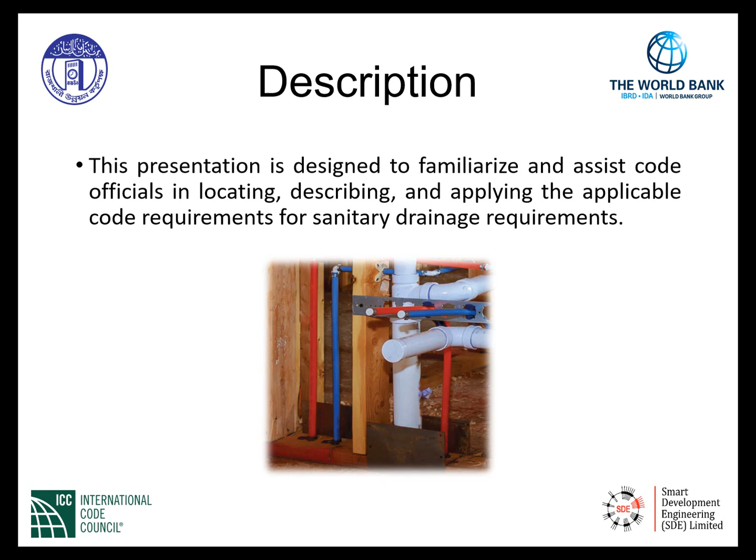An overview of the course. Internationally, code officials recognize the need for a modern, up-to-date plumbing code that addresses the design and installation of plumbing systems through requirements emphasizing performance.

This presentation will cover key topics of the following areas: purpose and scope, terminology, permits, drainage and sanitation plans, licensing of plumber, drainage and sanitation requirement, materials and appliances, hangers and support, and finally, design considerations.

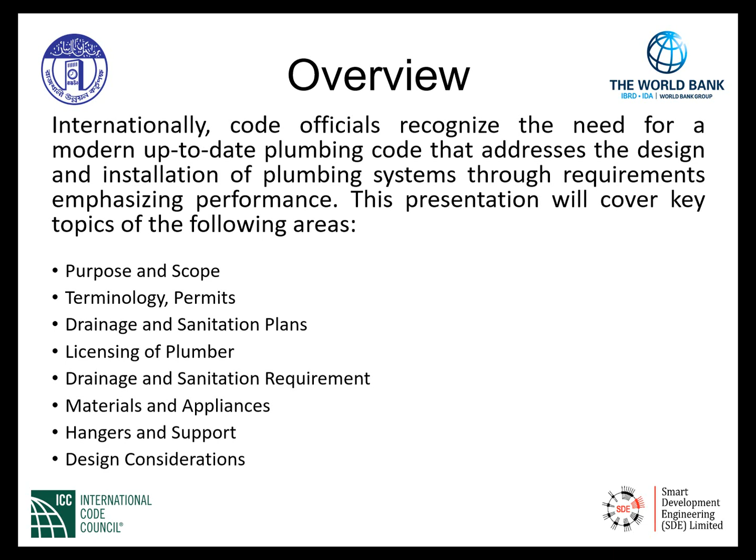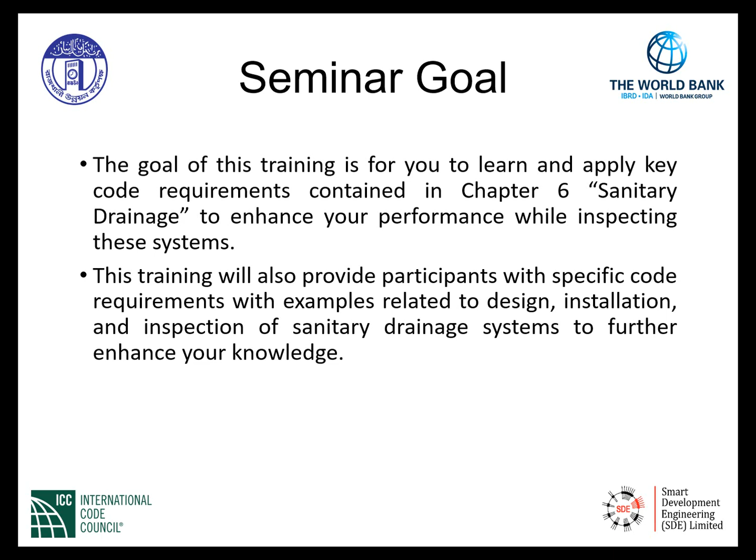Our seminar goal is for you to learn and apply key code requirements contained in Chapter 6, Sanitary Drainage, to enhance your performance while inspecting these systems. This training will also provide participants with specific code requirements, with examples related to design, installation, and inspections of sanitary drainage systems to further enhance your knowledge.

Our course objectives are as follows. Upon completion, participants will be better able to locate general topics in Chapter 6 Sanitary Drainage, locate applicable codes and standards for specific situations, apply code requirements to real-world situations, as well as explain the intent behind a given code requirement, and finally use good judgment to identify certain systems and related components as compliant or non-compliant.

We utilize the code as a guide for not only the design basis of a system regarding sanitary drainage and venting, but also the installation requirements for a safe system for the end user.

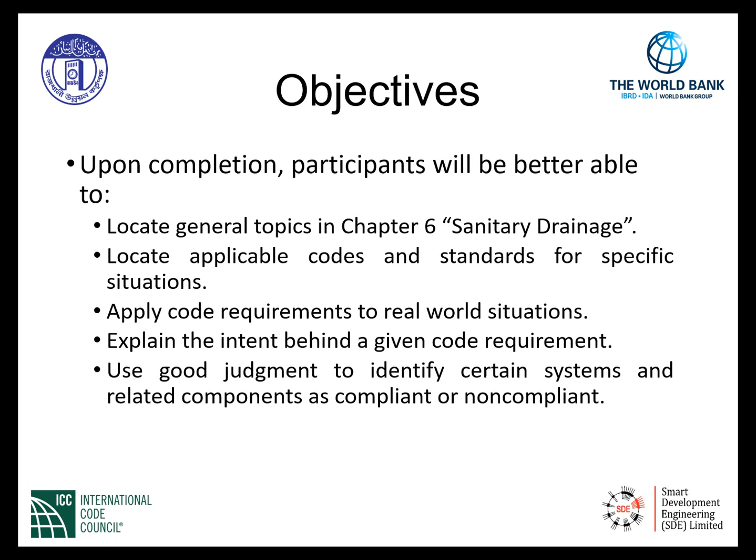Sanitary drainage. Some general information is indicated here. The purpose of Chapter 6 is to regulate the materials, design, and installation of sanitary drainage piping systems, as well as the connections made to the system.

This could be the drainage piping that carries the wet portion of the discharge, as well as the venting portion, which provides an atmospheric pressure into the system as well.

The intent is to design and install sanitary drainage systems that will function reliably, are neither undersized nor oversized, and are constructed from materials, fittings, and connections whose quality is regulated by this section.

Plumbing fixtures installed in a building or structure must connect to a sanitary drainage piping system, and that system must connect to a public sewer system or private disposal system.

The conventional method of sizing a sanitary drainage system is by drainage fixture units, abbreviated DFU. These are load values. The drainage fixture unit approach takes into consideration the probability of a load on a drainage system. The drainage fixture units allow us to properly estimate the capacity of pipes that are constructed for our drainage system.

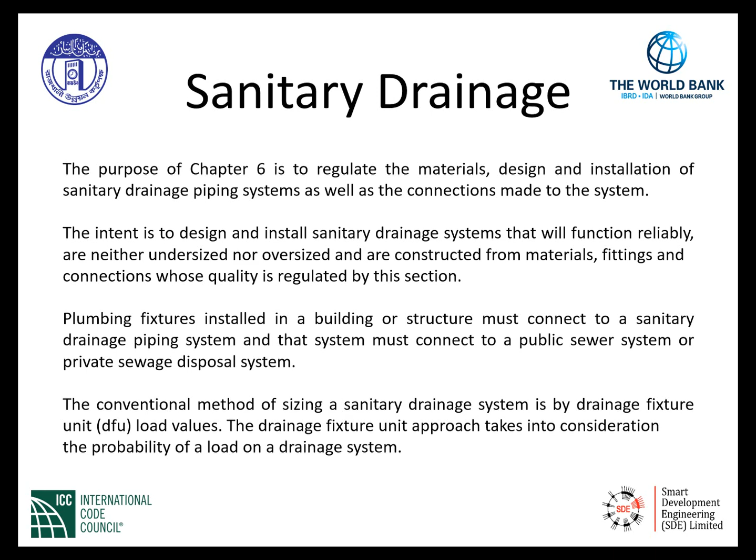Section 6.1 is titled Purpose and Scope. The purpose of this chapter of the code is to provide requirements and minimum standards for the planning, design, and installation of waste disposal systems in and out of buildings.

The authority has the responsibility for administering the code to ensure that waste disposal systems in homes and the buildings in which people live and work are designed, installed, inspected, and tested to provide acceptable waste disposal functions.

Additionally, the proper design and installation of waste disposal systems, according to Chapter 6, provides a level of protection regarding health, safety, property, and public welfare. This initial section of the code gives the authority that ultimate responsibility for administering this code to ensure public safety.

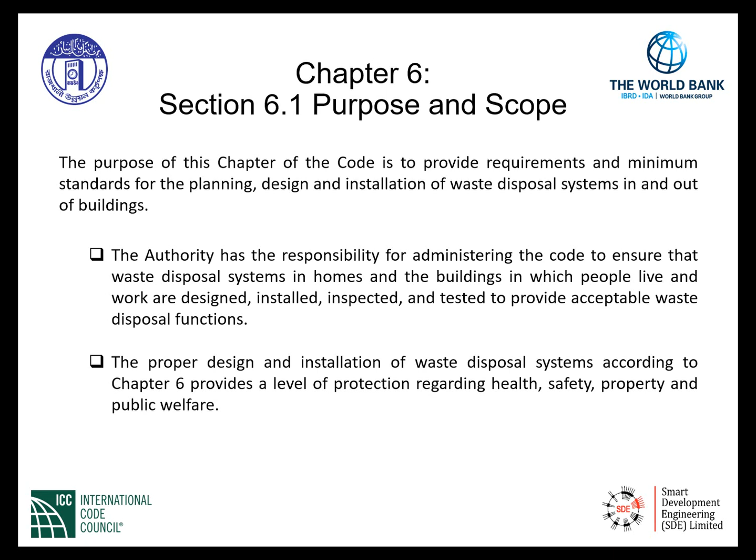Section 6.2 is titled Scope. This section gives us the requirements whether the application fits this code or not. When we look into section 6.2.1, it indicates the following: this chapter specifies the general requirements for environmental sanitation for different categories of buildings according to their occupancy classification.

We further look onto the next section, which is section 6.2.2. This chapter also covers the design, installation, and maintenance of drainage systems together with all ancillary works such as manholes and inspection chambers used within the building and from the building to public sewers or to off-site waste disposal systems—in other words, into septic systems and seepage pits or subsurface drainage systems.

Finally, Section 6.2.3 tells us that the disposal of waste from industries, nuclear plants, slaughterhouses, etc., are not covered by this code. These wastes shall be properly treated as specified by environmental quality standards of Bangladesh before their disposal into public sewers or into natural bodies of water.

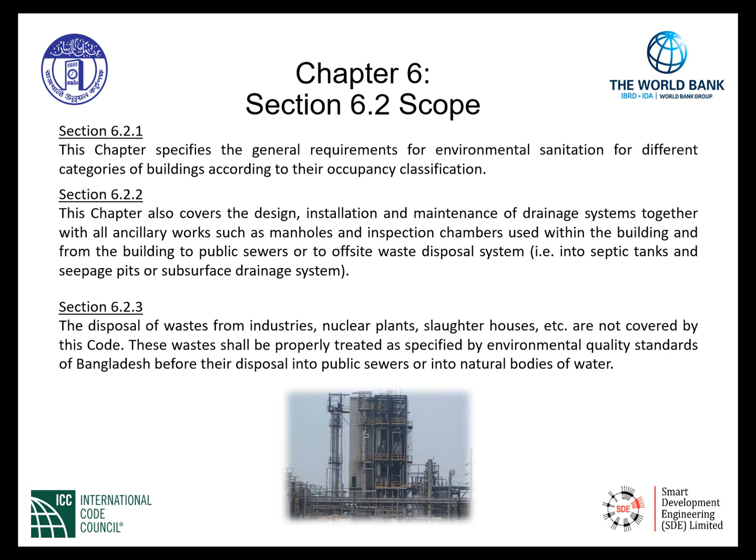So this section gives us the driving language to understand when we are in the code or out of the code with respect to our applications.

Section 6.3 is titled Terminology. This section provides an alphabetical list of all terms used and applicable to this chapter of the code. In case of any conflict or contradiction between a definition given in this section and that in any other chapter or part of the code, the meaning specified in this chapter shall govern for interpretation of the provisions of this chapter.

This spells out clearly that the terminology contained within this section is very specific to our study today on sanitary drainage systems. The terminology has a specific meaning and shall govern the interpretation accordingly. A code provision could be misinterpreted if the definition of a term, as used in the context of this code, is not understood. The following slides will provide key definitions to assist the code user in properly understanding certain terminology related to this chapter.

Codes, by their very nature, are technical documents. As such, literally every word, term, and punctuation mark can add to or change the meaning of the intended result. This chapter contains several terms that are important to understand the provisions of this code. Definitions are found both in this chapter and throughout the code. So let's look at some key terminology.

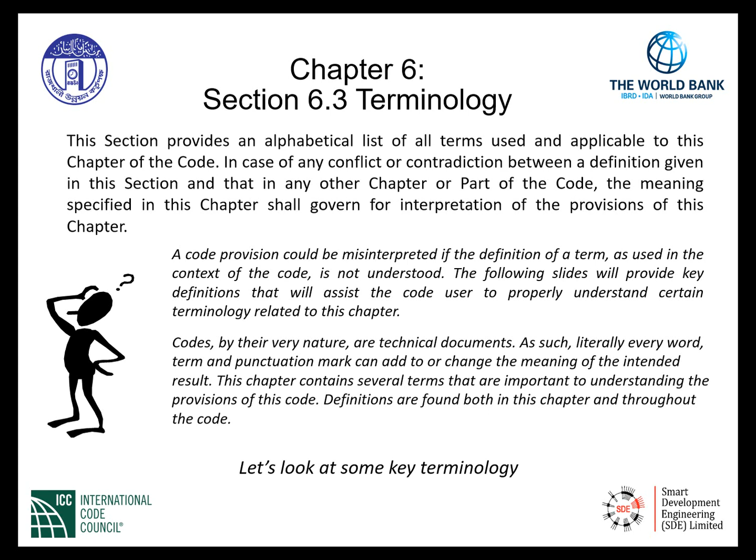Branch is defined as any part of the piping system other than a main, riser, or stack.

Drainage system gives us a specific definition. A drainage system includes all of the piping within public or private premises, which conveys sewage, rainwater, or other liquid waste to a legal point of disposal, but does not include the mains of a public sewer system or a private or public sewage treatment or disposal plant.

We have a drawing indicating a drainage system and components. The example shows a drainage system conveying waste from fixtures to the sanitary building drain, then to the sanitary building sewer. Looking at the drawing, we observe the sanitary building drain within the building below the second floor level. This is the location that conveys the discharge from all of the fixtures connected above. The piping is sloped downward and conveyed to the outside of the building into the sanitary building sewer.

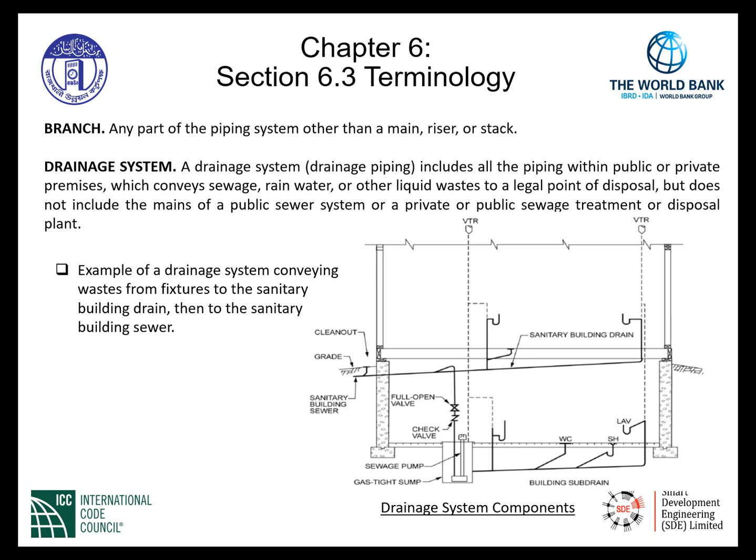Branch interval: the length of soil or waste stack corresponding in general to a story height, but in no case less than 2.5 meters, within which the horizontal branches from one floor or story of a building are connected to the stack. One branch interval corresponds to a length of drainage stack that has two horizontal branch connections at least 2.5 meters apart.

As seen in the graphic to the right, we have two different floor levels. Based upon these two different floor levels, we are concerned whether the piping arrangement indicated on both sides of the soil or waste stack is considered a branch interval. To the right-hand side of the soil or waste stack, we can see that the measurement from the horizontal drainage pipe below floor level 1, the soil or waste stack rises, in this case, 2.5 meters or more to the next horizontal drainage pipe tied to the soil or waste stack. When this happens, this is considered a branch interval.

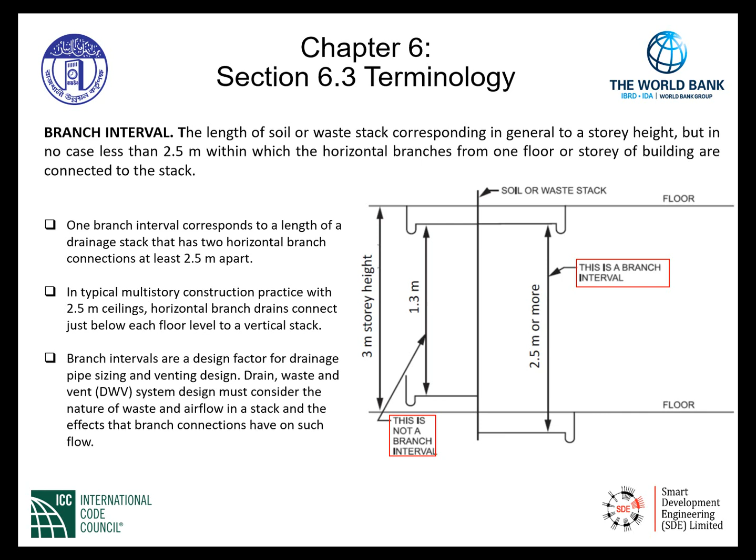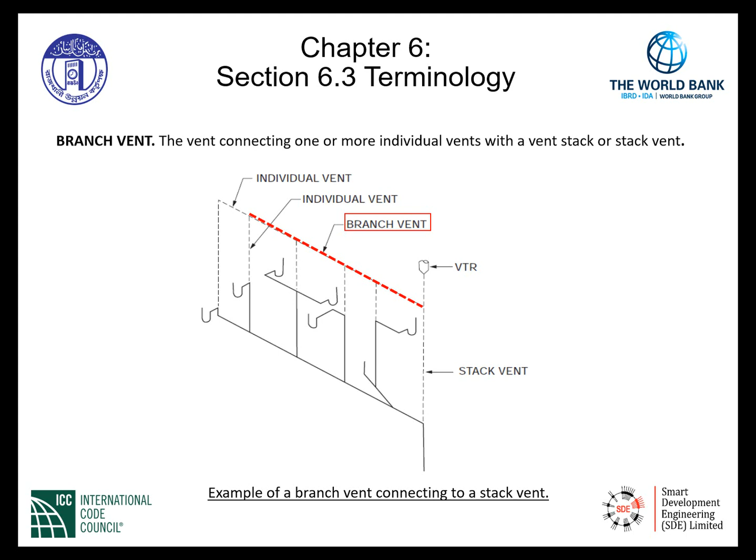The term building drain gives us an identification of what this particular segment of the building drainage system is. It is defined as that part of the lowest piping or open channel of a drainage system, which receives the discharges from soil, waste, and other drainage systems inside the walls of the building and conveys the same to the building sewer, beginning at 0.9 meters outside of the building wall. As you can see, the graphic at the bottom of the slide indicates the building drain as being the lowest piping indicated within the building. It then extends 0.9 meters from the outside of the building wall. That is where the building drain ends.

From that point, the next part of the piping system is titled building sewer. The building sewer connects from the end of the building drain and ties into the sewer main in the case of this graphic. By definition, the building sewer is that part of the horizontal piping of a drainage system which extends from the end of the building drain and which receives the discharge of the building drain and conveys it to a public sewer, a private sewer, individual sewage disposal system, or other point of disposal. This is also known as sewer.

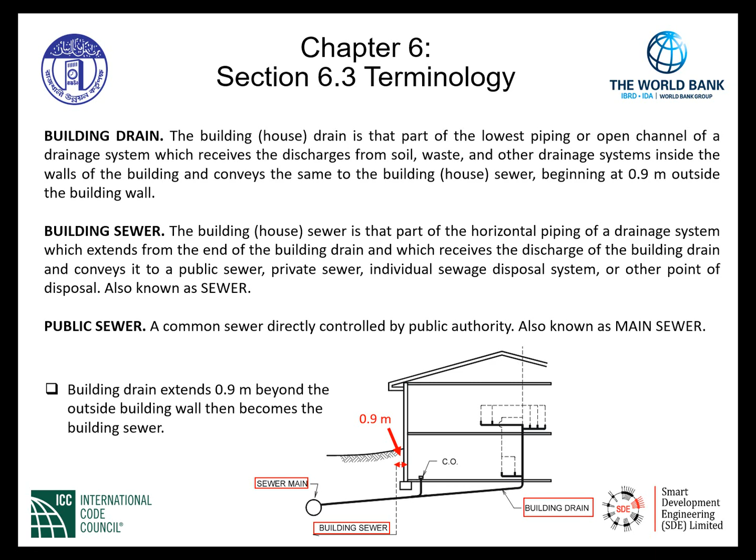And the connection between the two distinct systems. The terminology for horizontal branch helps us understand the specific function of this component. A horizontal branch is a drain pipe extending laterally from a soil or waste stack or building drain, with or without vertical sections or branches, which receives the discharge from one or more fixture drains and conducts it to the

soil or waste stack or to the building drain. As indicated in the drawing below, we have a soil stack rising vertically from below and the connection of our horizontal branch into the soil stack.

What is discharged into the horizontal branch is a washing machine standpipe, a laundry tub, and a kitchen sink. These are the fixtures that are discharged downward and enter into the horizontal branch that conveys the discharge and connects to the soil stack.

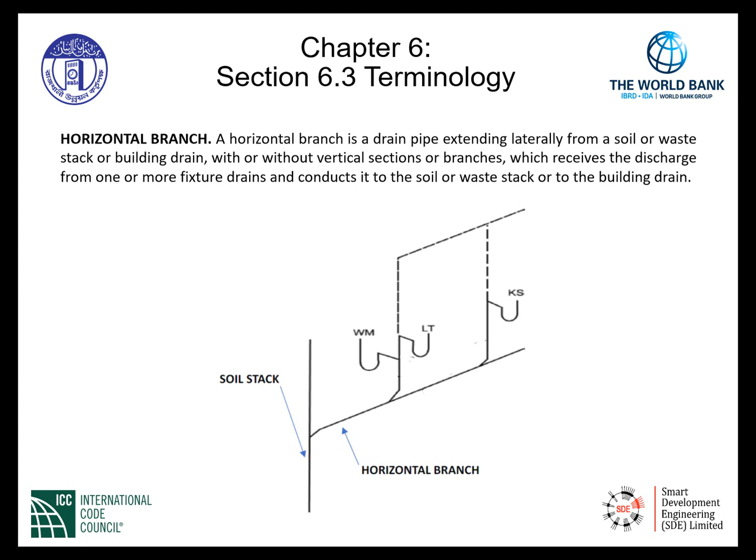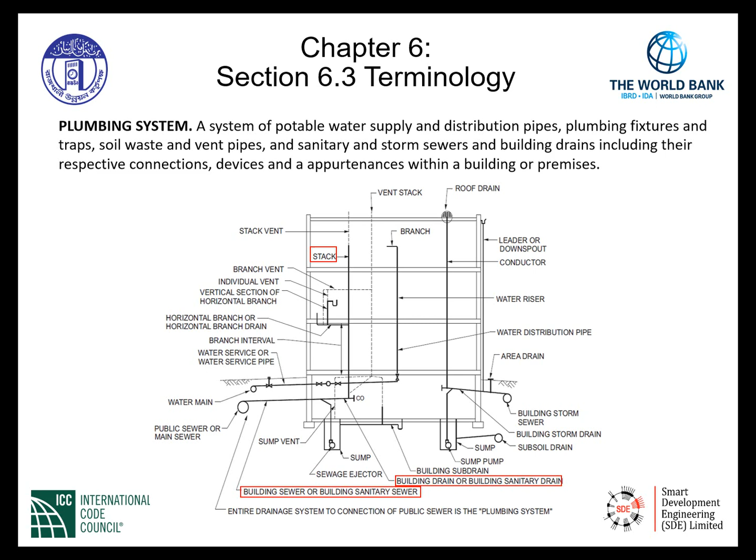Fixture unit. A fixture unit is a quantity in terms of which the load-producing effects on the plumbing system of different kinds of plumbing fixtures are expressed on some arbitrarily chosen scale. That arbitrarily chosen scale, however, is somewhat well-defined based upon probability.

The conventional method of designing a sanitary drainage system is based on what we call drainage fixture unit load values, abbreviated DFU, or simply fixture units can be used to define this particular loading probability. The fixture unit approach takes into consideration the probability of load on a drainage system.

Just like any system, we're concerned with respect to the demand of the system. Once we understand the demand of the system or certain parts of the system, we can understand and apply and analyze piping sizes for different parts of the system as a basis of design.

The DFU is an arbitrarily used loading factor assigned to each fixture relative to its impact on the drainage system. To further understand this value, we look at the DFU values determined based upon the following: average rate of discharge by a fixture, the duration of a single operation, and the frequency of use or interval between each operation. This is what goes into the fixture unit number, are these particular factors.

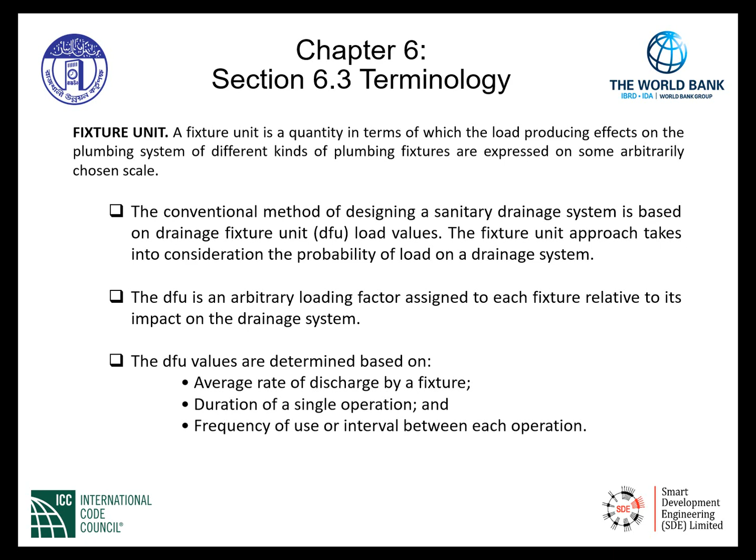Horizontal pipe is defined as any pipe or fitting which is installed in a horizontal position or which makes an angle of less than 45 degrees with the horizontal. When we look at the drawing below, we can see a pipe designated as a horizontal branch or horizontal branch drain. Looking at this particular pipe, we can verify that this is properly defined as a horizontal pipe according to the definition.

A vertical pipe is any pipe which is installed in a vertical position or which makes an angle of not more than 45 degrees with the vertical. Again, looking at our drawing, we have a pipe called a water riser. We can see the water riser is a vertical pipe, as well as the stack indicated on the left-hand side of the drawing. The stack and the stack vent, which rises above the stack, are vertical pipes, and they meet the definition accordingly.

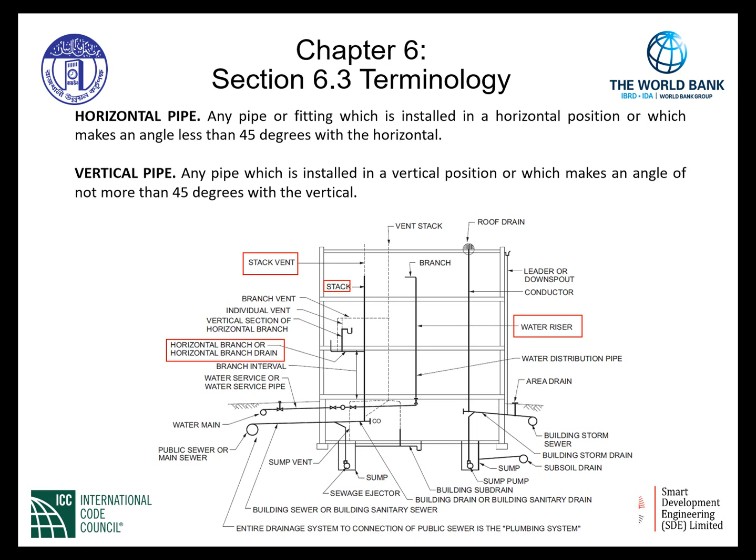Section 6.4, Drainage and Sanitation Plans. Specifically, Section 6.4.1 gives a requirement of permit. Drainage and sanitation systems shall not be installed until a permit for such work has been issued by the authority. For existing, this is only for addition and for alteration, or new building or for other premises.

Section 6.4.2, Application for Permit. An application for a permit for drainage and sanitation work shall be made on a prescribed form by the licensed plumber and the owner, or by his appointed person or agent to install or a self-contained workable part of such work.

This section contains the requirements for the issuance of drainage and sanitation permits. It also establishes how and by whom the application for a plumbing permit is to be made, how it is to be processed, and what information it must contain or have attached to it.

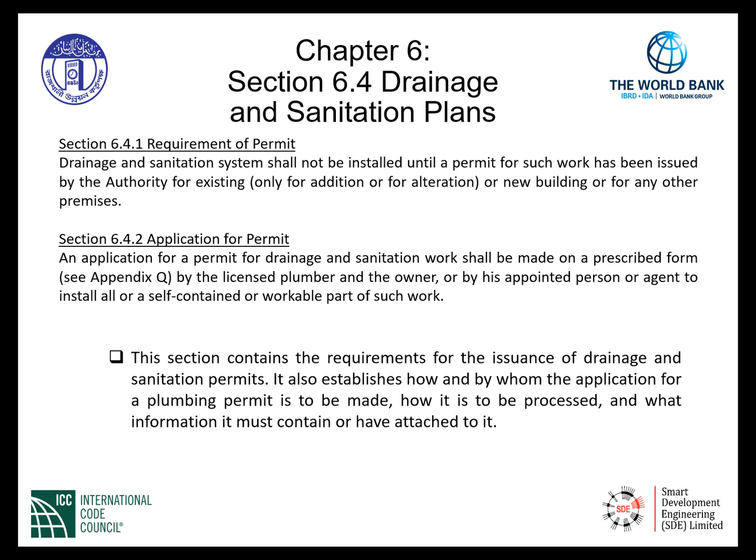As you can see in section 6.4.2, there is a reference to see Appendix Q. This will be a prescribed form for the application for permit. Appendix Q contains a prescribed form regarding information required to construct the drainage and sanitation system. The application for a permit shall be made on a prescribed form by the licensed plumber and the owner, or by his appointed person. So as an indication, the application is shown here.

And the information that is required on the application is itemized. Item number 1 requires the occupancy classification. Item number 2 requires the number of stories within the building. Number 3, the plumber needs to provide the location. And number 4 is very specific as it references certain code sections.

Item number 4 indicates this application is accompanied by all required plans, drawings, and the drawings must show details of materials, must show sizes, gradient, and location of pipes and fixtures, and other details as specified in the following sections: 6.4.2, 6.4.3, 6.4.4, and 7.5.2 of Part 8 of the Bangladesh National Building Code.

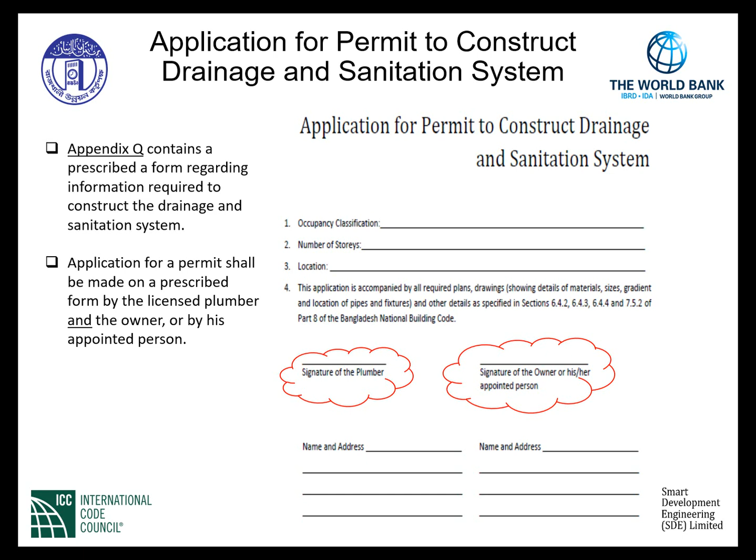Section 6.4.2, application for permit. This is a continuation. The application shall accompany the building drainage plans, an adequate description of the proposed drainage and sanitation installation in a drawing with the following details. Now, as noted in parentheses, drawn to a scale not less than 1 in 100.

Item A indicates one of the following details: plans of the building with typical arrangement of plumbing fixtures. This is important because the authority needs to see the arrangement of plumbing fixtures, where they will be located. Item B, details of the sanitary waste disposal system, details being materials and piping, things of that nature. C, venting system in the building drainage system.

D gets more specific here with respect to materials, sizes, and gradients of all proposed piping. E is the position of manhole, traps, waste pipe, any rainwater pipe, vent pipe, water closet, urinal, lavatory, sink, or other appliances in the premises, and their connection with sewerage, drainage system, or with private waste disposal system.

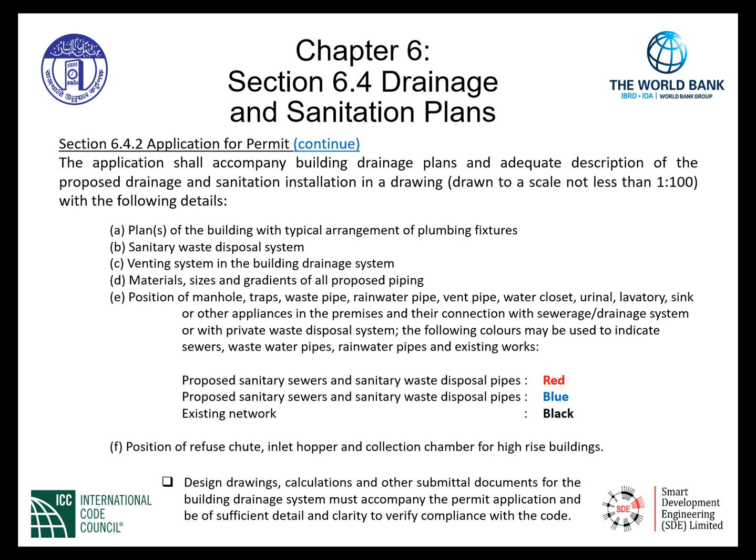An example of design plans for a building drainage system is shown below. Observe the routing and the sizing of the drain and vent piping systems.

By inspection, we can see the sanitary drainage pipes at the far right-hand side of the drawing. These are the main arteries that discharge from branches of the building drain. The dark colored lines are the wet portion of the drainage system. And if we look to the leftmost portion of the drawing, we can see that the water closet indicated WC-H is indicated accordingly.

The pipe sizes are indicated as well, as far as the fixture drain from the water closet, H, is indicated at 100 millimeters, and the arrangement or routing of the piping is also shown to come downward, flowing into the sanitary drainage system, as well as the lav, which is the sink for the bathroom.

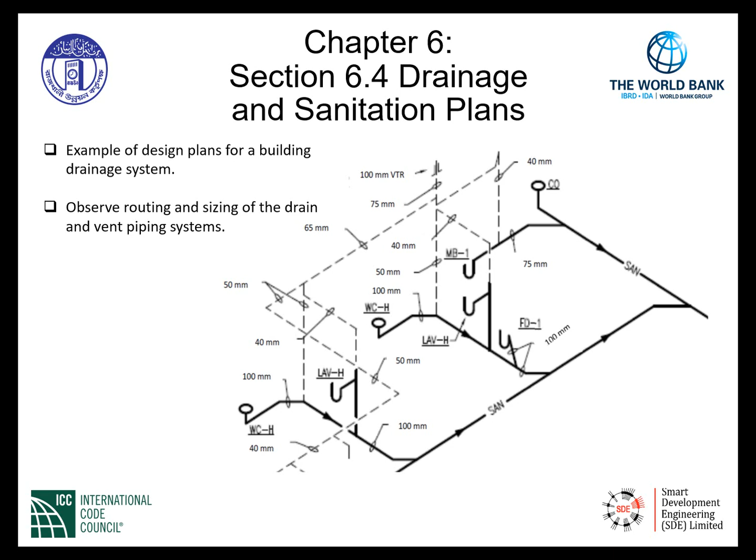Section 6.4.3: In addition to a drainage plan, a separate site plan of the building shall be submitted with the following particulars. Item A: any adjoining plots and streets with their identification must be shown and documented on the plan.

Item B: position and invert level of public sewers, if there are any, and the direction of flow in that public sewer. Item C: level of proposed drains connecting to the sewers.

Item D: position and layout of private waste disposal system. This is in the absence of public sewers. And finally, item E: alignment, size, and gradients of all drains. These items must be submitted along with the building construction documents for the sanitary drainage systems.

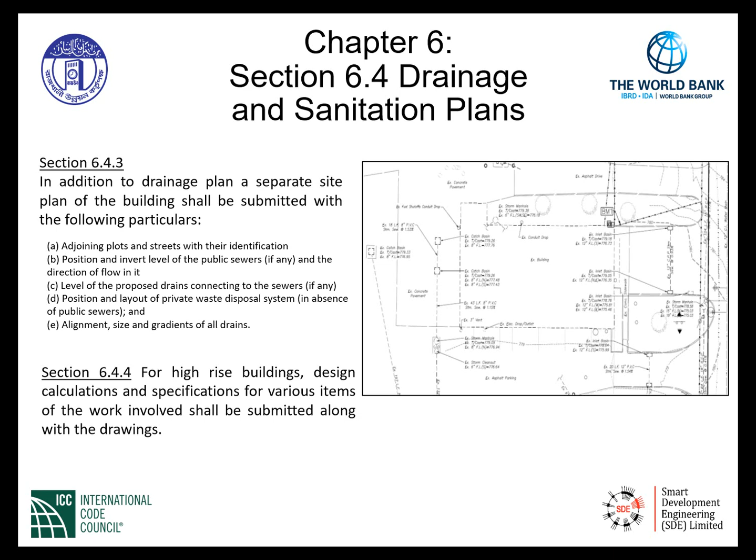Section 6.4.5 is related to permits and approvals. The building official shall examine or cause to be examined all applications for permits and amendments thereto within 45 days. If the application does not conform to the requirements of all pertinent laws, such application shall be rejected in writing, stating the reasons therefor. If the proposed work satisfies all code requirements, the authority shall issue a non-transferable permit.

This section requires the code official to review, or cause the review of, all submittals for a permit. Reviewing is compliance with the code, and the code official is to verify that the project will be carried out in accordance with any other applicable laws.

A detailed review of plans and specifications is, of course, necessary to verify that the design complies with the code, thereby avoiding costly modifications during the course of the installation. This is very important, and the authority, as seen in the section above, needs to provide this within 45 days.

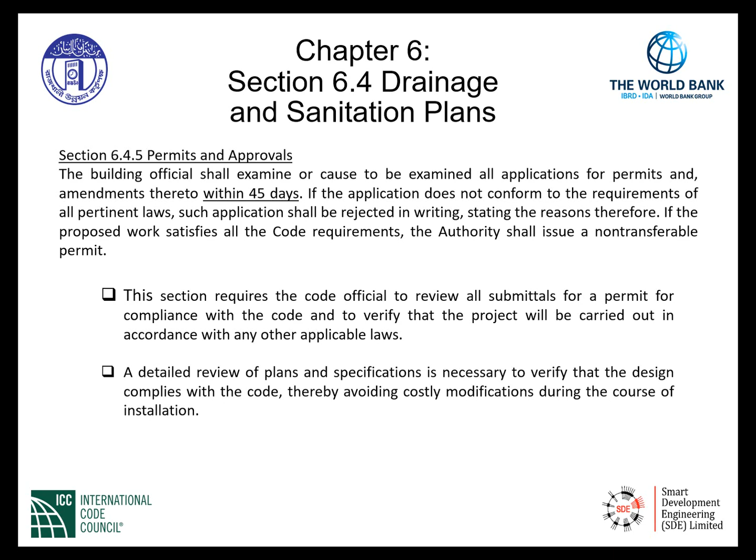Section 6.5 is licensing of plumbers. Specifically, Section 6.5.1 indicates no individual, partnership, corporation, or firm shall engage in the business of installation, repair, alteration, or maintenance of plumbing, drainage, and sanitation work without obtaining a license from the authority.

This section mandates that the plumbing work must only be executed by a qualified plumber. Licensure of qualified plumbers is a requirement in this section for installation, repair, or alteration of plumbing, drainage, and sanitation systems. Plumbing work shall be executed only by a licensed plumber under the control of the authority, and shall be responsible to carry out all lawful directions given by the authority.

This section mandates the importance of having qualified people install the drainage system in accordance with this code.

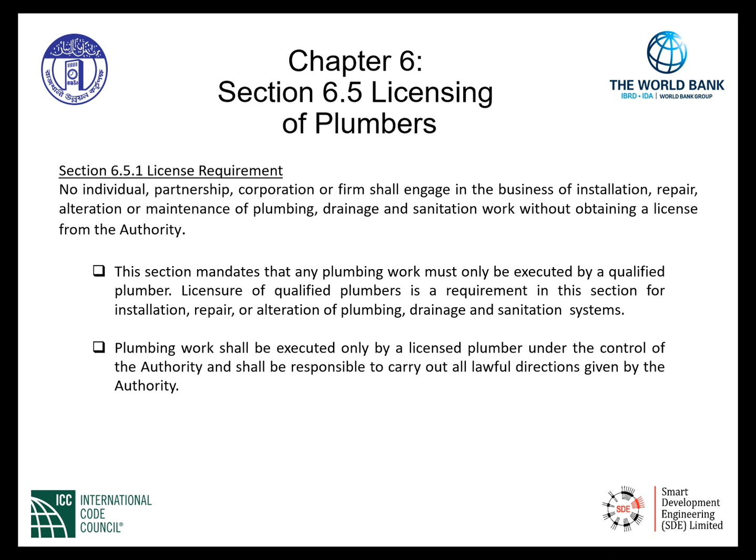Section 6.5.2 is titled Examination and Certification. In this section, the authority establishes a plumber's examination board. The board will determine the requirements for qualification and procedures for examination of applicants for license. The authority will issue the license to such applicants who meet the qualifications therefor and successfully pass the examination conducted by the board.

In order to qualify as a licensed plumber, the authority establishes an examination board first. Qualified individuals must be qualified by meeting academic, vocational, and experience requirements, as may be set up by this particular board. Additionally, they must complete and pass an examination. This whole process ensures the safety of people by allowing only qualified people to install, repair, and alter drainage and sanitation systems.

However, we have Section 6.5.3, Annulment of License, which states the license of a licensed plumber may be nullified by the authority if it is proved that plumbing work has been completed and certified by the licensed plumber, violating the provisions of this code deliberately, setting aside the approvals given in the permit, or without receiving the permit from the authority.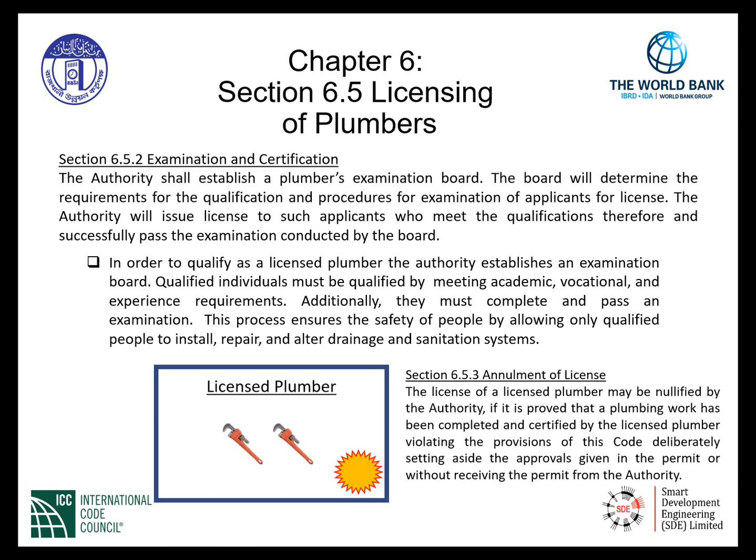So this last section indicates that there are certain areas that the authority is permitted to nullify the license from the licensed plumber if they violate any provisions of this code.

Regarding single-family dwelling units, Section 6.6.1 gives us some general information. Item A: each family dwelling unit on premises abutting a public sewer or with a private waste disposal system shall have at least one water closet and one kitchen sink or washing facilities. This is very specific in the amount that must be installed in the family dwelling unit. It is recommended to have at least one bathroom with a bathtub or shower to meet the basic requirements of sanitation and personal hygiene, and in that case, bath and water closets shall be separately accommodated.

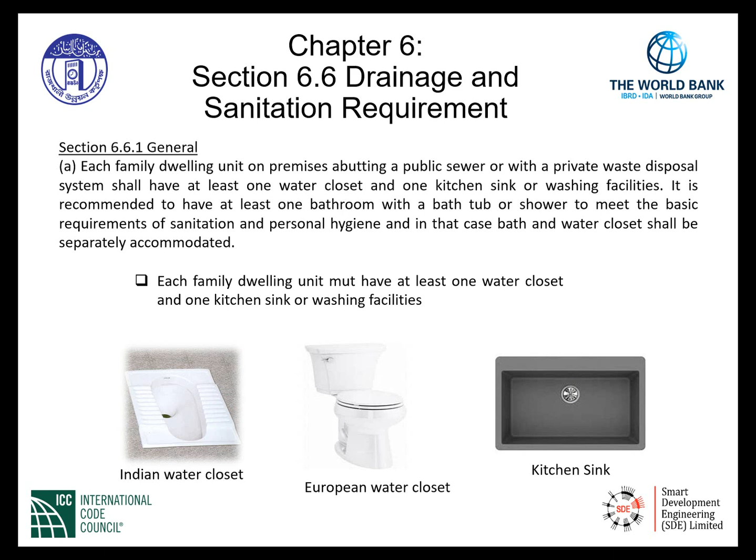Each family dwelling unit must have at least one water closet and one kitchen sink or washing facilities as indicated. Below we have the Indian type water closet, the European type water closet, and an example of a kitchen sink. All three are fixtures that are recommended and required in this particular section. This deals with personal hygiene, the requirements of a water closet, and one kitchen sink or washing facility is mandated specifically in this section, as well as a bathtub or shower within the bathroom.

Continuing with Section 6.6.1, item B: all other structures for human occupancy or use on premises abutting a sewer or with a private waste disposal system shall have adequate sanitary facilities, but in no case less than one water closet and one other fixture for cleaning purposes. Very specific here.

Item C: there shall be one water tap and an arrangement for drainage in the vicinity of each water closet in all buildings. Item D indicates there shall be at least one water tap and arrangement for drainage in the vicinity of each urinal or group of urinals in all buildings. The picture below indicates a group of urinals. We have, in fact, a basin with a water tap indicated for use adjacent to the urinals or the group of urinals indicated.

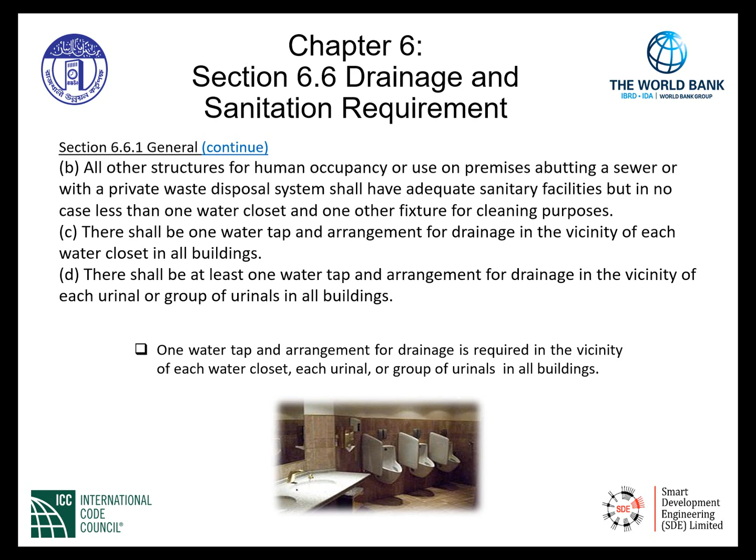Item E: there shall be separate facilities for each sex for public toilets and for public bathing places based on the percentage of each anticipated sex.

Item F: where a drinking water fountain is provided, it shall not be installed in a toilet room. This is a very specific requirement. This is an unsanitary condition, having a drinking water fountain installed in a toilet room, and item F prohibits this installation specifically. Item G: rooms containing water closets or urinals shall be separated by a partition wall from places where food will be prepared and served.

Indicated below on the drawing is a kitchen area where food is being prepared. We have two toilet compartments, as seen, with the doors opening into the kitchen. Item G will prohibit this. The doors must open outward, out of the kitchen area. As indicated, any types of rooms containing water closets need to be separated by partition walls, and that does not comply as indicated. Item H: all water closets and urinals shall be provided with a flushing system.

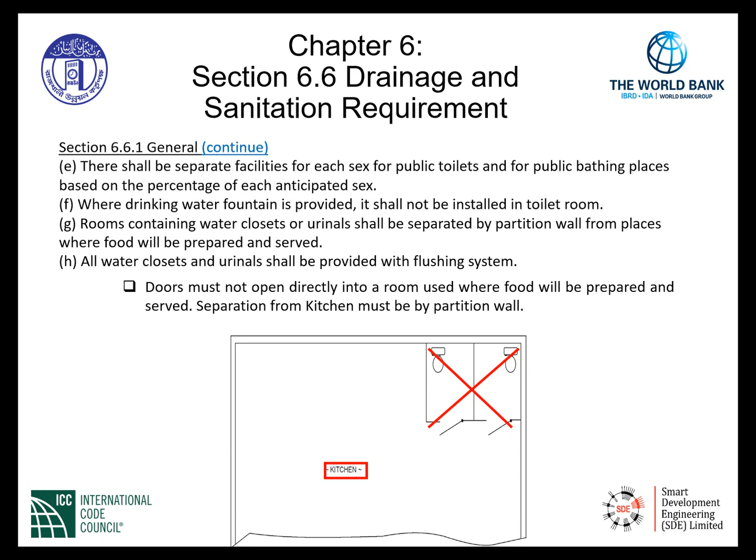The minimum number of fixtures is given by requirement in Section 6.6.2, Table 8.6.1. Sections 6.6.2.1 and 6.6.2.2 provide the minimum number of fixtures required for different categories of buildings according to their occupancy classifications.

The fixture requirements for occupancies not provided in these sections shall be subject to the approval of the authority, meaning that this section requires the type and number of plumbing fixtures be based on the actual use of the building or space and the occupant load as determined by the building code. If there are occupancies not provided in these particular sections, the authority must evaluate the application and make a ruling on the number of fixtures for those applications not indicated in these code sections.

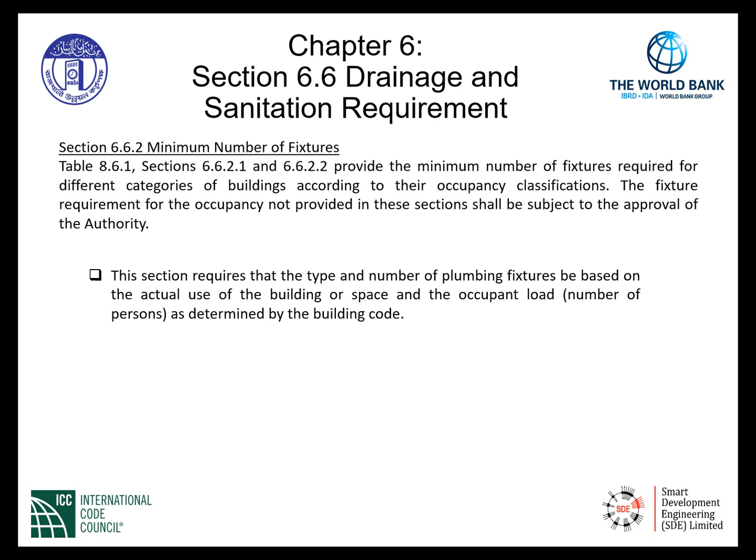Table 8.6.1, titled Plumbing Fixtures Requirement. This is a partial view of that particular table. Discussion of the table is as follows.

In the first column, titled Type of Building Occupancy, this gives us, in the first row, E-business with categories E1 for offices, E2 for research and testing laboratories, and E3 for essential services. The category E business also gives us the water closets and the wash basins and the ratios for distribution for the number of males and females accordingly. The next column, the middle column, is bathtubs or showers.

In certain occupancies, bathtubs and showers are required, but as seen here in the E-business category, there are no requirements for bathtubs or showers. Urinals are given here for male in the ratio shown in this particular column.

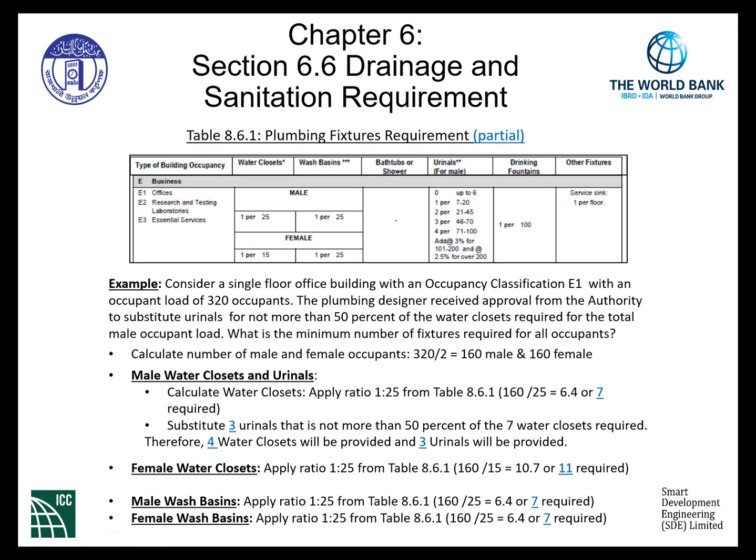Next step, we apply drinking fountains. We apply a ratio of 1 to 100 from table 8.6.1, in the column labeled drinking fountains. We need 1 drinking fountain per 100 occupants. From our total occupant load of 320, we simply divide by 100, which equates to 3.2, so we specify a minimum of 4 required drinking fountains for this particular occupancy.

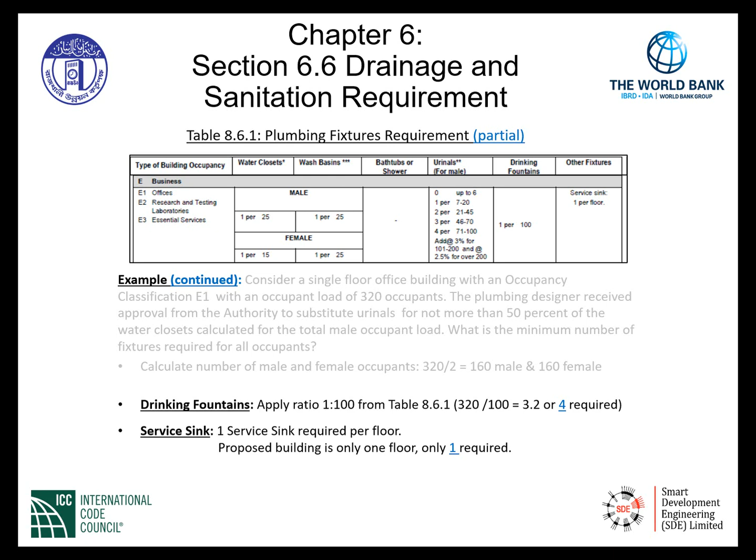Last is our other fixtures indicated in the last column. We need 1 service sink per floor indicated in the table. However, our proposed building is only 1 floor, so only 1 service sink is required and will be specified by the engineer. This is a good example of how to apply the table accordingly and provide the minimum number of fixtures required.

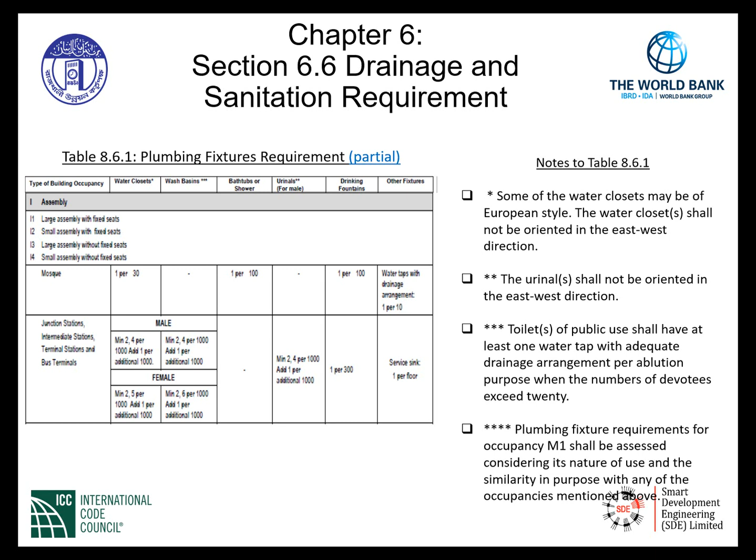Additionally, floor drains may be required and installed where we have appliances such as water heaters, furnaces, air conditioning units, and boilers that need to discharge their waste to certain floor drains. However, the floor drains require ready access and must not be located under appliances, equipment, or shelving, or within wall cavities, or covered by objects that might obscure their location. They need to be accessible.

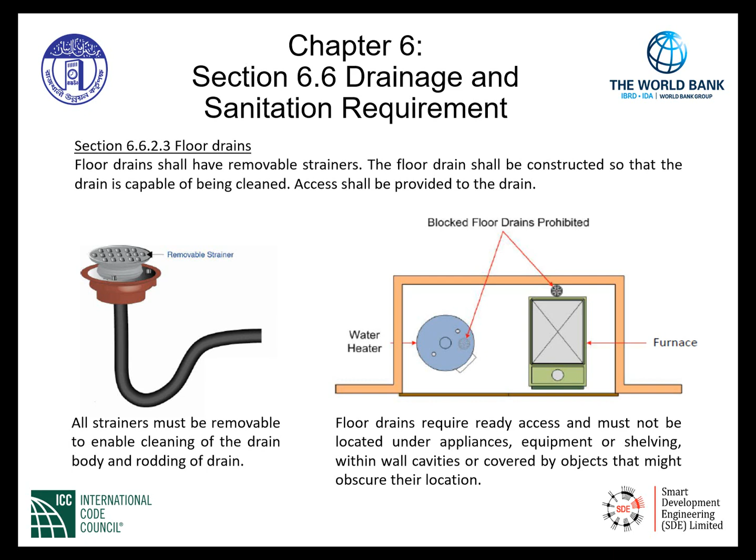Automatic clothes washers have a very specific waste connection. In section 6.6.2.2, the waste from an automatic clothes washer shall discharge through an air break into a standpipe. The trap and fixture drain for an automatic clothes washer standpipe shall be a minimum of 50 millimeters in diameter.

For applications where an air break is indicated, as this automatic clothes washer section requires, an air break is simply breaking the flood level elevation of the particular fixture with the drainage tube going down into the standpipe. Where there is no possibility of back siphonage occurring in the indirect waste pipe, or contamination of the indirect waste pipe has no impact on the health of building occupants, it can be permitted, as in this case being utilized as an air break connection.

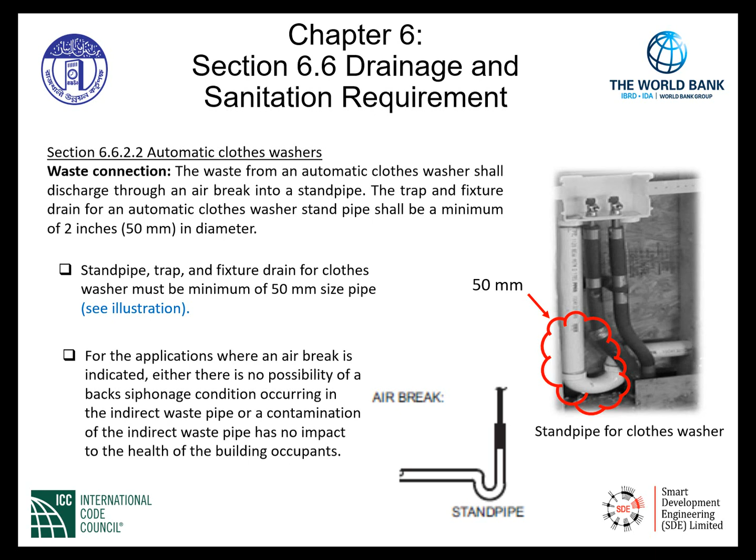Section 6.6.2.4 gives us the requirement in our code for physically handicapped plumbing facilities. All buildings other than residential, educational, storage, and hazardous, according to building occupancy classification, having public toilet facilities with required number of fixtures shall have at least one water closet for each sex and one drinking fountain accessible to and usable by physically handicapped persons. The water closet compartment for physically handicapped persons shall be in accordance with section 6.9.4.

This section requires that certain public toilet facilities, as well as the water closets contained within, are constructed so that persons with physical disabilities have access to those facilities in a manner similar to persons without disabilities. These people may have disabilities in which they maneuver in wheelchairs, or use canes or walkers - that is the physical disabilities we are talking about.

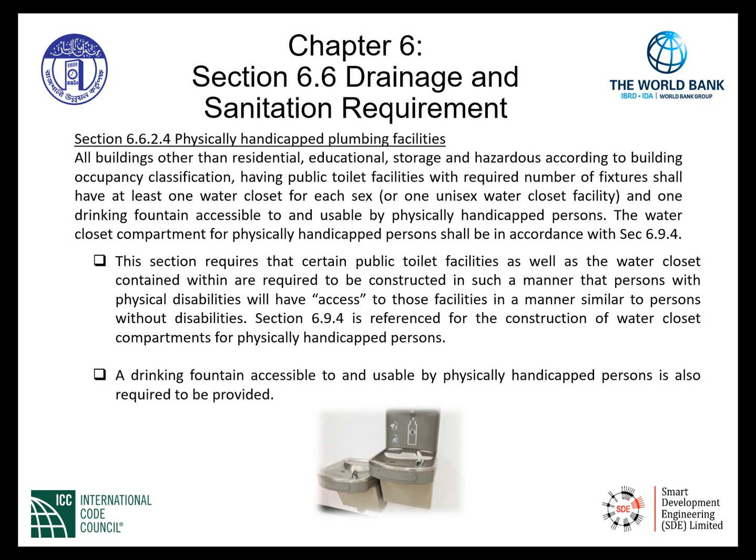As an example, the water closet compartment for physically handicapped persons needs to be in accordance with section 6.9.4, titled Provision for Wheelchair Users. The water closet compartment for wheelchair users shall have at least the dimensions and fittings as shown in figure 8.6.4.

This section provides technical requirements regarding minimum dimensions for the compartments, the water closets, support rails, and door width for wheelchair users to access and use the water closet fixture.

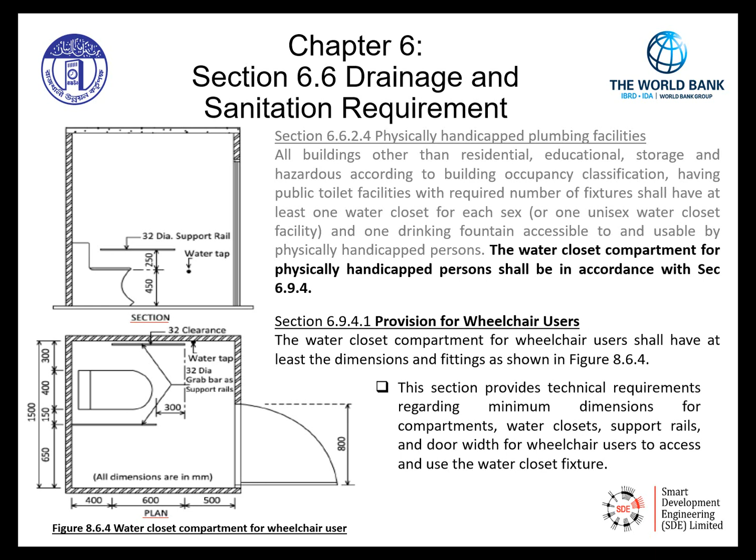The next part is indicated in section 6.9.4.2. This section gives provision for ambulant disabled people. The minimum dimension for water closet compartment and the fittings for ambulant disabled people shall be shown in figure 8.6.5.

The purpose of the ambulatory stall is more to serve persons with mobility impairments who may be using a walker, a cane, or crutches in order to walk and mobilize.

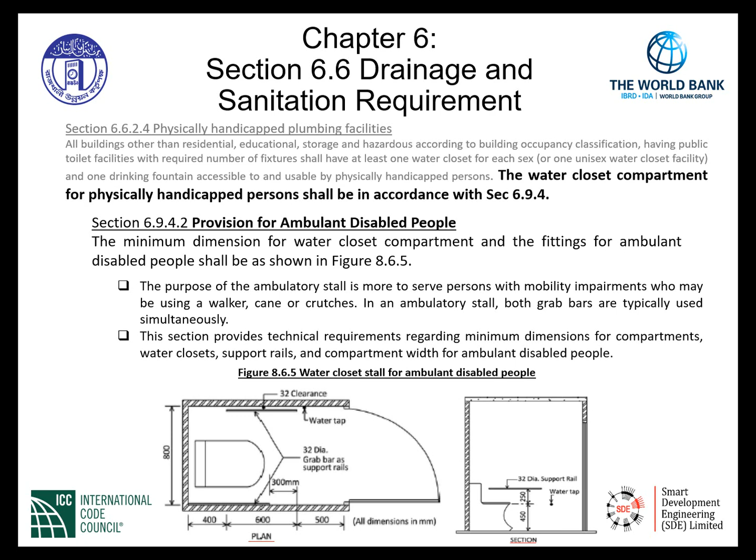Accessibility requirements are also given to us in section 6.6.3 regarding the location of these accessible facilities. The fixtures specified in section 6.6.2 for public buildings shall be located not more than one floor above nor more than one floor below the floor occupied by the people for whose use the fixtures are intended, unless elevator service is available, except that in buildings which are accessible to the physically handicapped, there shall be minimum facilities as specified by the code.

It is desirable that the path of travel to the facility shall not exceed a travel distance of 150 meters. This is to prevent health problems for building occupants related to difficulty in accessing a needed toilet facility in a timely fashion. The code clearly provides 2 conditions that must be met.

Number 1, the building occupant must not be required to travel beyond the next adjacent story above or below his or her location within the building. Number 2, the required toilet facilities must be located within 150 meters.

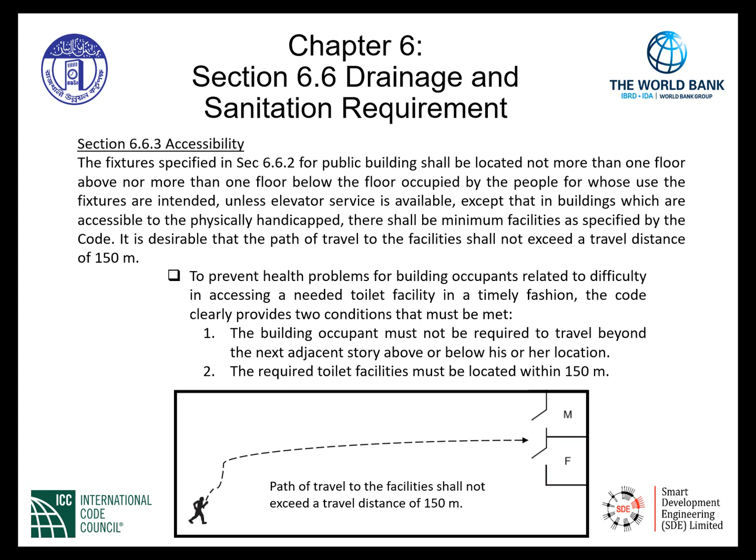Section 6.7, Materials and Appliances. Different sanitary appliances, materials, and fittings shall conform to the requirements of the standards as provided in tables 8.6.3 of this chapter and table 8.5.9 of chapter 5, part 8. For other appliances, materials, and fittings not listed in the above-mentioned tables, they shall be subject to the approval of the authority.

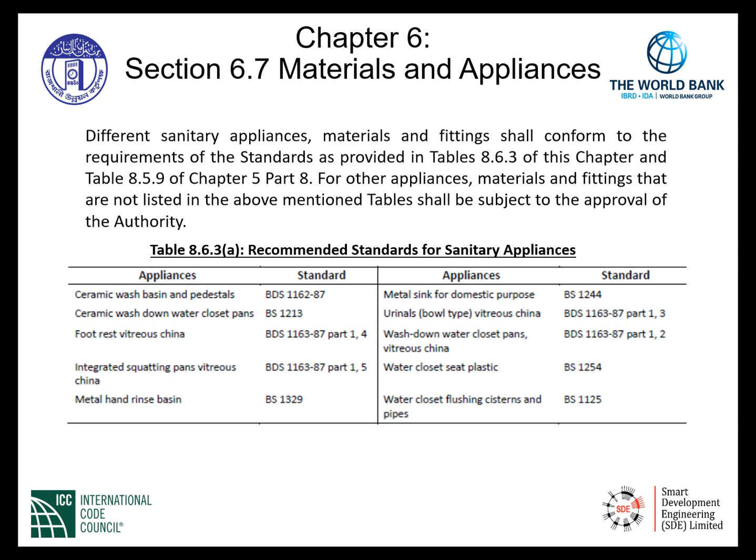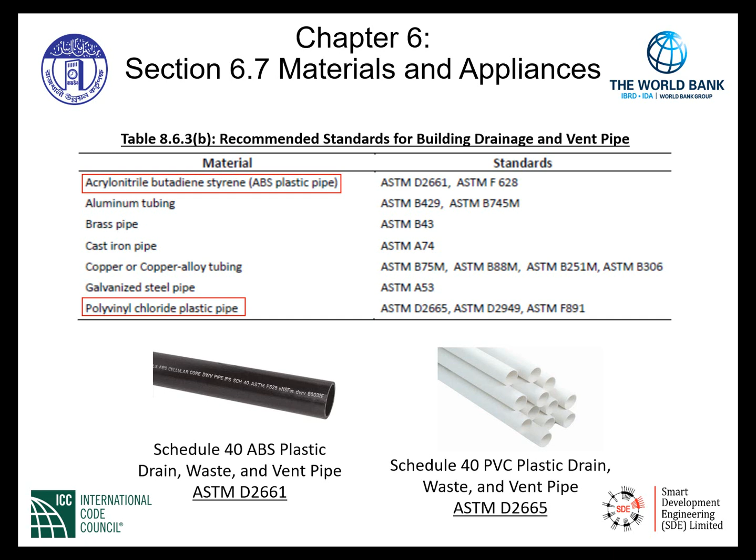As an example, Schedule 40 ABS plastic drain, waste, and vent pipe is properly addressed as complying with the standard ASTM D2661 for that particular material. Again, Schedule 40 ABS plastic drain, waste, and vent pipe. Additionally, Schedule 40 PVC plastic drain, waste, and vent pipe must comply with the standard ASTM D2665.

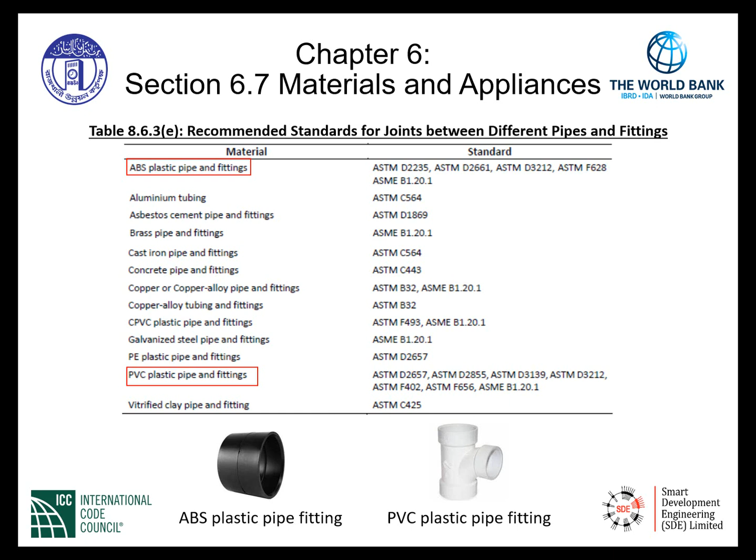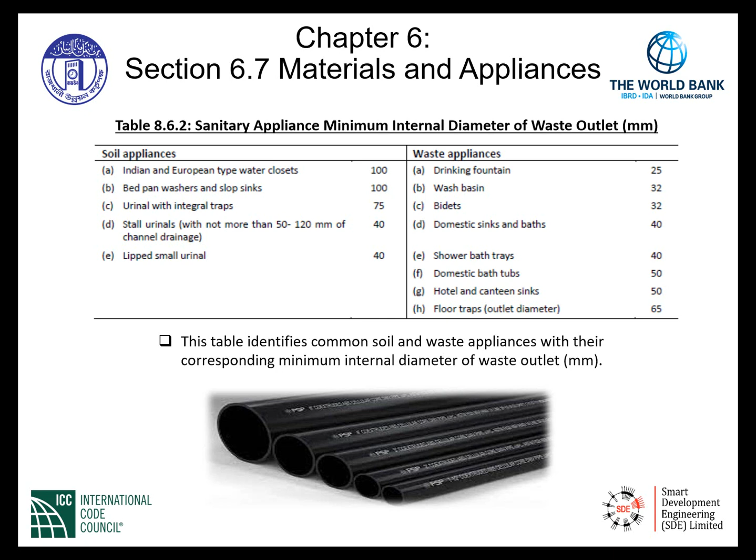Urinals with integral traps are permitted to have 75 millimeter internal diameter, and stall urinals with not more than 50 to 120 millimeters of channel drainage must have a minimum internal diameter of 40 millimeters. Finally, lipped small urinals must have a minimum internal diameter of 40 millimeters. Those are our soil appliances. To the right, we have our waste appliances, such as drinking fountains, wash basins, bidets, domestic sinks and baths, shower bath trays, domestic bathtubs, hotel and canteen sinks, and finally floor traps, which give an outlet diameter of 65 millimeter at a minimum. This table essentially identifies some common soil and waste appliances with their corresponding minimum internal diameter of waste outlets in millimeters.

Section 6.9.5.2 gives us a requirement regarding the slope of horizontal drainage piping. Whenever possible, all drainage systems shall be drained to the public sewer or private waste disposal system by gravity. Horizontal drainage piping up to 75 millimeters in diameter shall be installed with a fall of not less than 20 millimeters per meter, and for larger than 75 millimeter diameter, the fall shall not be less than 10 millimeters per meter. It is a good policy to design the system for the highest possible velocity.

However, consideration should be given to the fact that high velocities in pipes with slopes greater than 20 millimeter per meter may cause self-siphoning of the trap seal. So when we read this section, the code user must understand the fall regarding certain piping. Even at higher velocities, if we carry solids suspended within our drainage piping, we need to make sure the solids do not drop out of suspension due to steep slopes that one may think is better in a drainage system, because the solids will drop out of suspension and cause blockages.

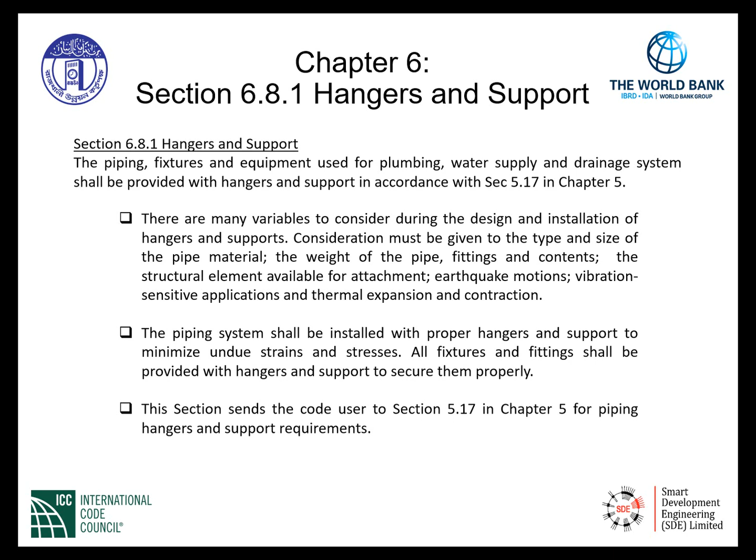Referencing Section 5.17 in Chapter 5 for piping hangers and support requirements, Section 5.17.1, Galvanic Action. We need to make sure that we do not have dissimilar metals in contact with one another. If we do, that may provide and even promote galvanic action.

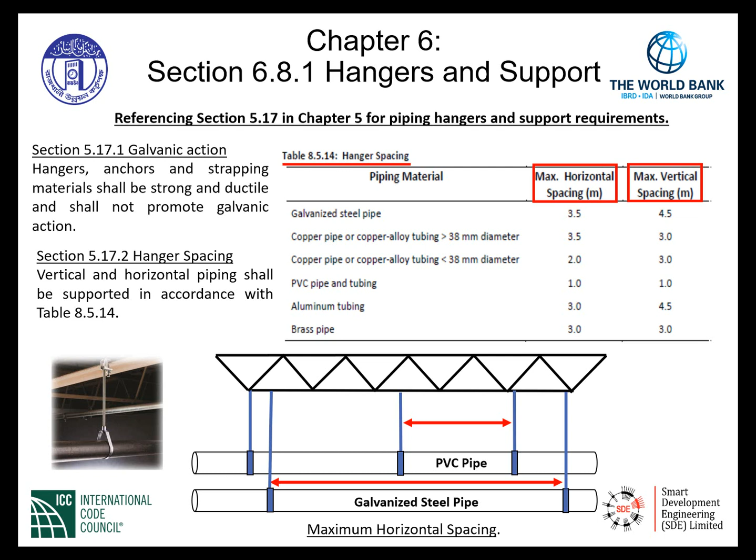Section 6.9 gives us design considerations. Some general requirements are given to us in our code.

Section 6.9.1, titled Objective. For the design of drainage and sanitation system of different buildings according to building classification, the objective shall be to safeguard against fouling, deposition of solids, and clogging, and with adequate cleanouts and inspection chambers so arranged that the drains may be readily cleaned without risk of health hazard.

The sanitary drainage system of the building and premises must be designed in such a way as to allow for flow of waste through adequately sized piping that will not impede the flow of the drains. This involves joints, fittings that not only direct the drainage flow, but will also improve periodic maintenance, such as drain cleaning and rodding.

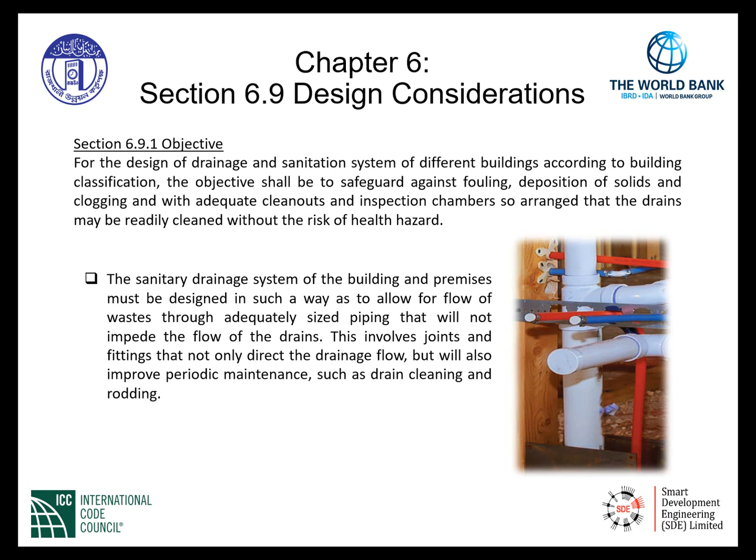Section 6.9.2 gives us general requirements. Item A indicates the plumbing system shall be designed and adjusted to use the minimum quantity of water consistent with proper performance and cleaning. Item B, plumbing fixtures, devices, and appurtenances shall be supplied with required volume of water at pressures adequate to enable these to function properly and without undue noise under normal conditions of use.

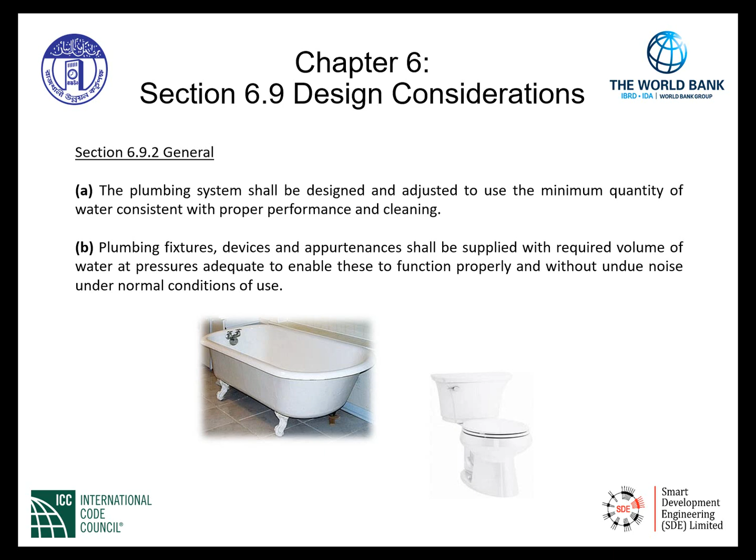Section 6.9, Design Considerations. We need to specifically understand certain design requirements that go into designing and constructing the plumbing sanitary drainage system.

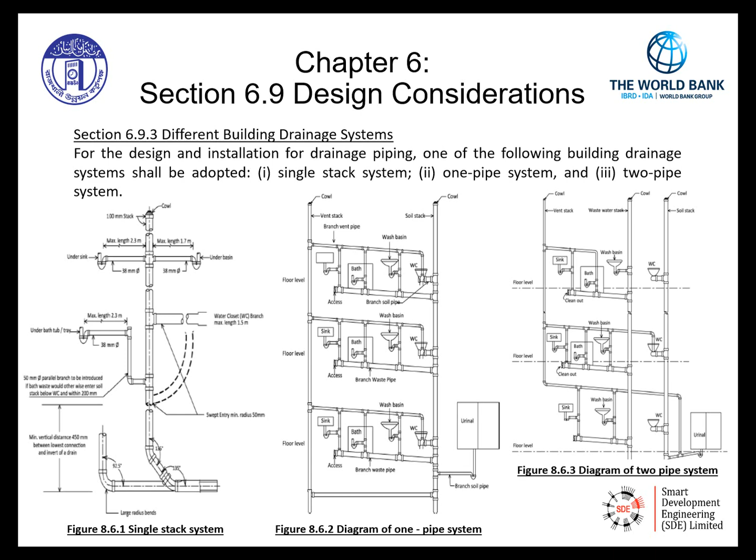To further understand our piping systems, we will go into further detail. Section 6.9.3, item A, indicates the following: the single stack system may be used with a 100 millimeter diameter stack for buildings up to 5-story height. The fixtures on each floor shall be connected to a single stack for increasing the rate of discharge in the downward direction. So here is the requirement and limitation for this particular type of piping system. This system is allowed for up to 5-story height, and it may be used with a 100 millimeter diameter stack.

The recommended depth of water seal trap for the different fixtures shall be in accordance with Table 8.6.4. When we reference that table below, we will see that the fixtures are indicated on the left-hand side of the table, and the water seal requirements in millimeters are indicated on the right side. As an example, for floor traps, the fixture we call a floor trap, maybe a floor drain, must have a minimum water seal of 50 millimeters.

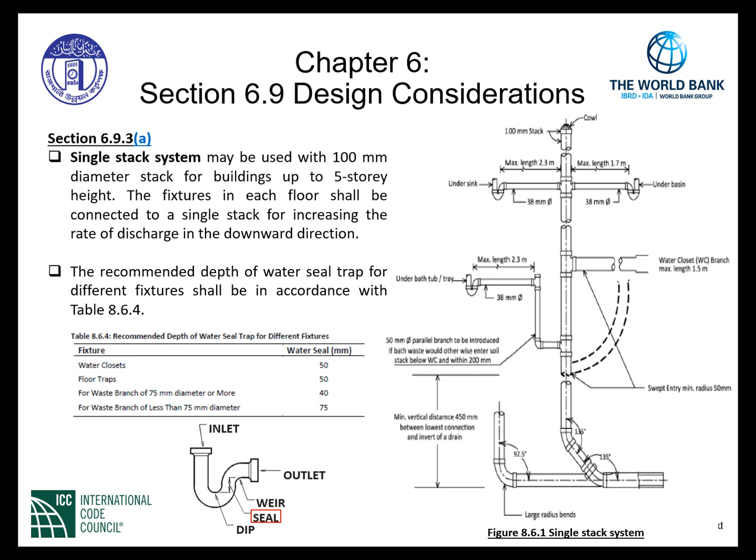As we continue our discussion regarding the single stack system, there shall be at least 200 millimeters vertical distance between the waste branch and the soil branch connection, while the soil pipe will be connected to the stack above the waste pipe. The size of the soil branch shall not be less than 100 millimeters. The horizontal branch distance for fixtures from the stack and bends at the foot of the stack, to avoid back pressure, as well as the vertical distance between the lowest connection and the invert of the drain, shall be as shown in figure 8.6.1.

As we can see, according to that figure, we have the distances indicated as such. We have the 200 millimeter distance indicated under the bathtub. As you can see, we have a 50 millimeter diameter parallel branch introduced if the bath waste would otherwise enter the soil stack below the water closet. And we have our 200 millimeter distance shown, with the size of the soil branch not less than 100 millimeters. As we can see, up at the top of the stack, this is a full 100 millimeter stack accordingly.